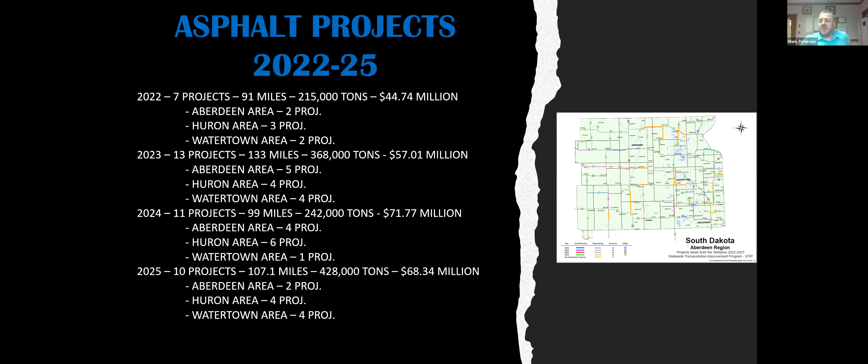And then in 2025, we're looking at 10 projects for 107.1 miles, 428,000 tons for $68.34 million. 2 of those projects in the Aberdeen area, 4 in the Huron area, and 4 in the Watertown area.

A little bit closer look at each year. In 2022, we linked the 2 South Dakota 22 projects together. They totaled 23.1 miles. That'll be South Dakota 22 from I-29 to 15 in Clear Lake, and also South Dakota 22 from Hazel East to US 81 North. Put together, both those jobs total about 48,000 tons.

Part of the reason we link jobs like that is just proximity, and then looking at our staffing within our area office to handle them. It gets a little easier for us, and we try to split them out as much as we can, but those two made sense to link together.

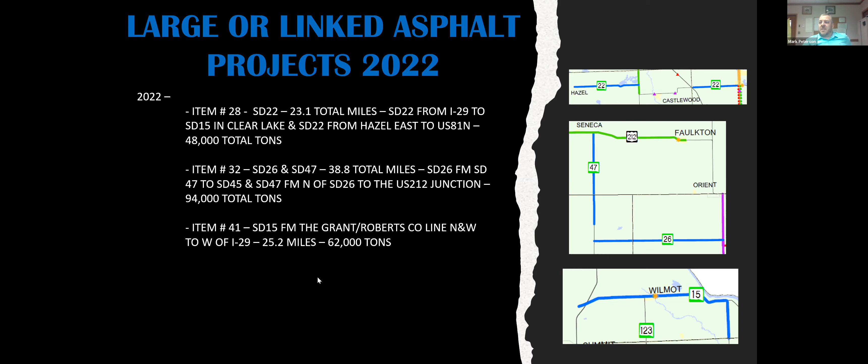And then the Highway 15 job and the Grant Roberts County line, that's a long job, 25.2 miles, and that's 62,000 tons. So those are the biggest asphalt jobs in 22.

In 23, we have Highway 12 from Aberdeen to Ipswich, a 24.7 mile job, 55,000 tons. Then one of our longer jobs, South Dakota 20, runs from the Faulk Potter County line all the way over to Highway 45.

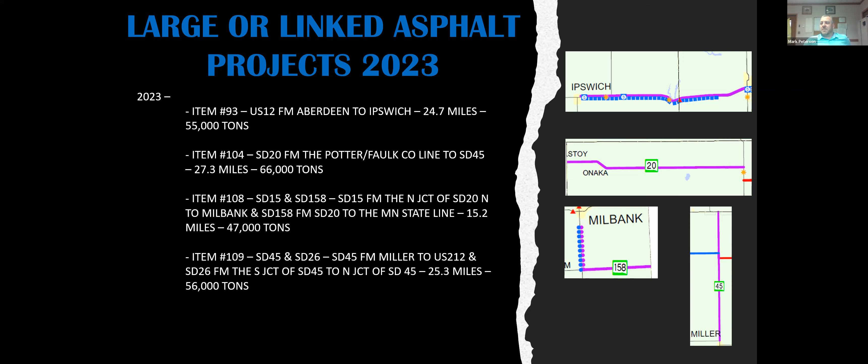That's 27.3 miles. And then we linked the Highway 15 and 158 projects because they butt up against each other. The 15 will be paving on a new grade, and then 158 is an overlay. That's a 15-mile job, 47,000 tons.

And then Highway 45 and 26 north of Miller. That's a 25-mile job.

In 24, we have the Highway 25 and 28 paving, and that'll be the paving on the grading job. It's a 16-mile job, 77,000 tons.

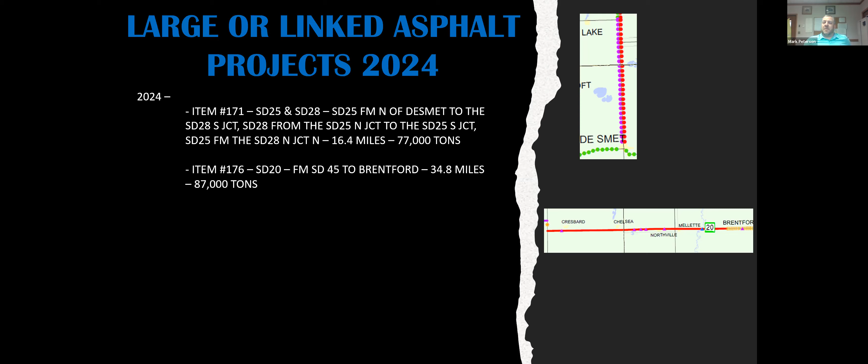And then on Highway 20, that's a long straight stretch there, 34.8 miles that runs from Brentford. We're looking at 87,000 tons on that job.

And then 25, we'll be doing US 212 from the Potter Faulk County line east. It's a 22-mile job, 60,000 tons.

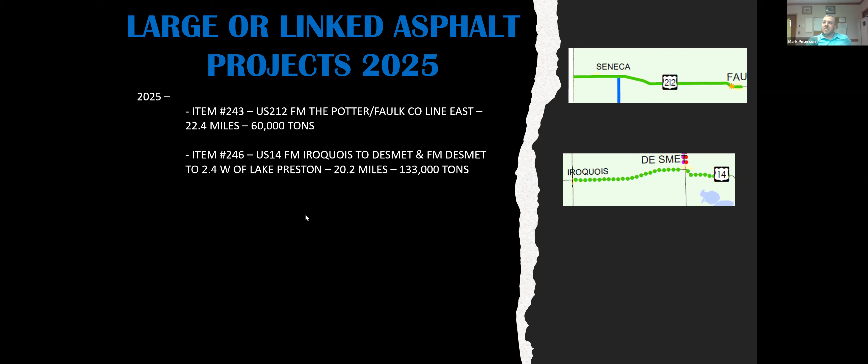And then we have the Highway 14 project. We link together that runs from Iroquois to DeSmet, and then from DeSmet to just west of Lake Preston. That's a 20-mile job, 133,000 tons. That's a crack and seat on the old concrete there, or rubbleized overlay, sorry.

For our grading and shoulder widening, upcoming years, in 22, we're looking at 4 projects, 16.9 miles of grading for $43 million. 2 in the Aberdeen and 2 in the Watertown areas.

In 23, we're looking at 19.8 miles for $28.4 million, 2 in Watertown and 1 in Huron. In 24 is a big year for us, grading wise, looking at 6 projects,

45.4 miles, almost $60 million. 1 in Aberdeen, 1 in Watertown, and 4 in the Huron area.

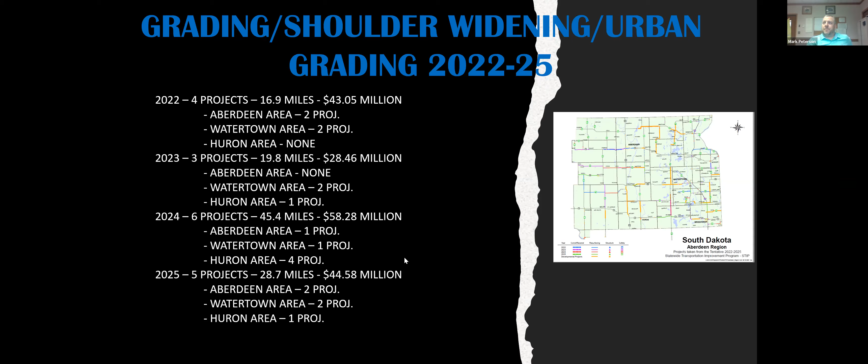And then in 25, we have 28.7 miles, 5 projects for $44 million. 2 in Watertown, 2 in Aberdeen, and 1 in Huron.

Looking at the individual projects within the years, Highway 12 from Ipswich to the divided highway west to Aberdeen, that's 20 miles. It's going to be super 2-lane construction. So we have intermittent passing lanes on alternating sides, and then intersection modification on that, and then paving on top of those lanes.

Item number 11, that's the Highway 12 project just east of Aberdeen. That's a grading and PCC paving job. That project I think will be let in 22, but I don't actually look for construction until 23 with the schedule we're going now, or some minimal work in 22. And that'll be concrete paving on top of that grading. That'll be converting that from a divided 4-lane to a joined 5-lane for most of that job.

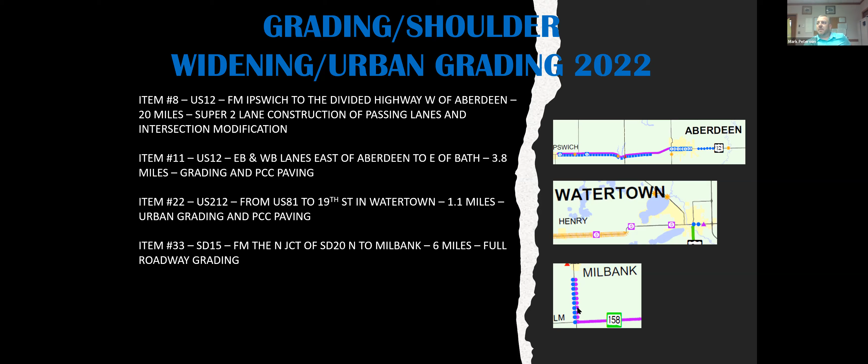US 212 in Watertown, that's a 1.1 mile urban grading and paving job. And then Highway 15 from the north junction of South Dakota 20 north to Milbank, that's 6 miles of full roadway grading there.

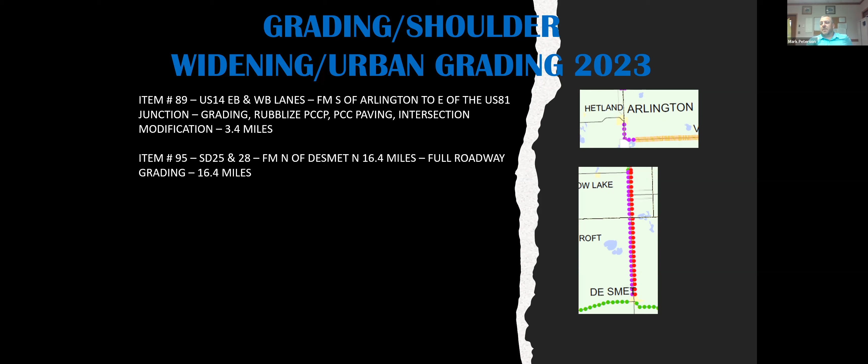In 23, we have the US 14 eastbound and westbound lanes just south of Arlington, and then that US 81 junction. We're going to regrade all of that, rubbleize the existing surface, and then PCC paving and intersection modification. And then Highway 25 north of DeSmet, 16 miles. That's full roadway grading on that project.

In 24, a 1 mile urban reconstruction downtown Huron. That's urban grading and concrete.

And then South Dakota 10, from east of the James River to Britton, that's a 24 mile shoulder widening project. I look for that one due to the length to be a 2-year project. So we're looking at 24, 25 construction.

South Dakota 34 and 249 in Fort Thompson, that's urban grading, curb and gutter, 3.1 miles.

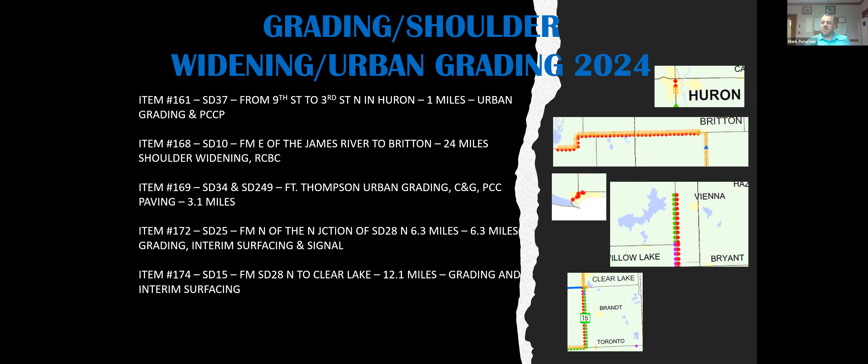South Dakota 25 from the North Junction of South Dakota 28 north, 6.3 miles. That's just north of the previous grading job. That's full roadway grading, interim surfacing, and then we got a traffic signal or a railroad crossing signal.

And then Highway 15, going from South Dakota 28 north to Clear Lake, that's full roadway grading and interim surfacing.

In 25, we got a project we're working on with North Dakota DOT. They're actually taking the lead on the project. We're going to regrade Highway 37 and raise it at the border where it goes underwater when we have high water situations in James River.

And we have Highway 25 from 9 north of US 212 to the Clark County, Day County line. That's 10 miles of full roadway grading and interim surfacing.

Highway 28 from Estelline to South Dakota 15. That's 9.2 miles of grading and interim surfacing.

We have South Dakota 28 going from 192nd Street just east of Lake Poinsett to about 5 miles west of Estelline. That's 3.5 miles of grading, interim surfacing. There's a structure that has to be replaced over the Big Sioux.

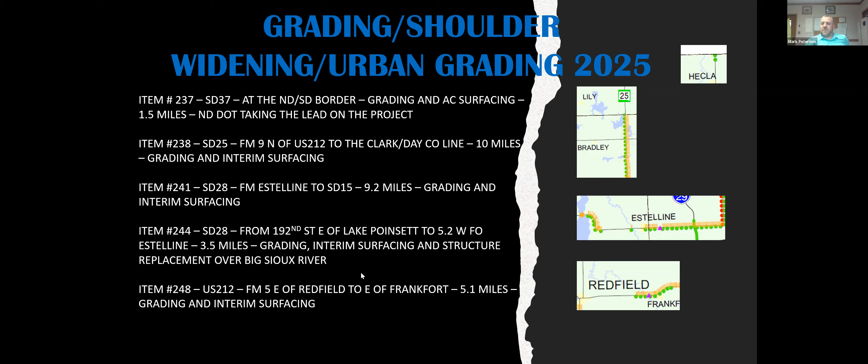And last, we have a 5 mile stretch of US 212, 5 miles east of Redfield. That'll be a full roadway grading and interim surfacing there. There's a lot of frost heave issues in that roadway.

Last but not least, looking at our structure outlook, we have a lot of local government type structures coming the next few years. In 2022, we're looking at 19 projects across the region for a total of $33.4 million: 6 in the Aberdeen area, 7 in the Watertown area, and 6 in the Huron area. In 23, we're looking at 23 total projects, 24 structures: 1 in the Aberdeen area, 5 in the Watertown area, and then we have 17 in the Huron area that year.

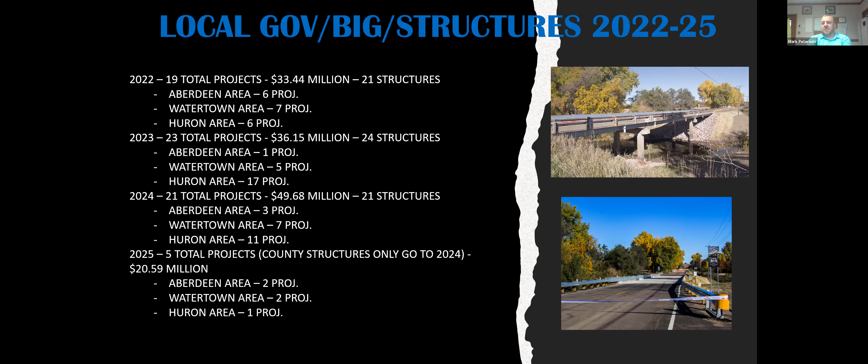In 24, 21 projects and structures for $49.7 million. We're looking at 3 in the Aberdeen area, 7 in the Watertown area, and 11 in the Huron area. And then in 2025, we have 5 total projects. These don't include any county structures because right now on our schedule, the county structures only go out to 2024. But we're looking at $20.59 million on the state system for that year: 2 in the Aberdeen area, 2 in the Watertown area, and 1 in the Huron area. So that's kind of the overlook of our larger and more complex projects.

You got any questions?

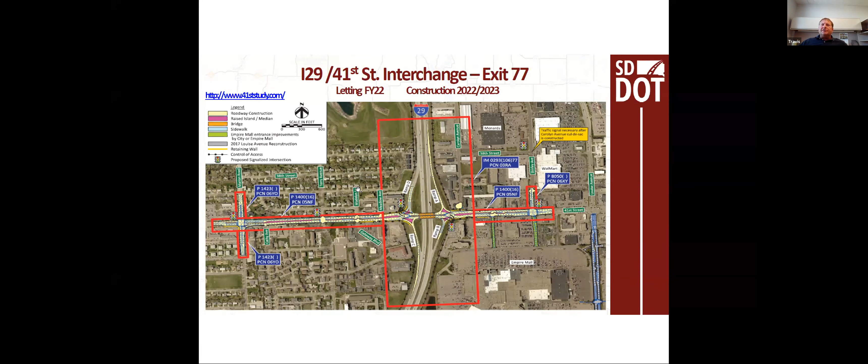This project includes underground work with the city of Sioux Falls, 36,000 yards of unclassified excavation. We have 65,000 squares of concrete paving and another 22,000 square feet of retaining walls at the interchange.

Moving a little south, this is the 85th Street interchange, or proposed interchange, at exit 74 in Sioux Falls. Almost $50 million on this project. It's another diverging diamond, with letting in 2022 and construction likely in 2023, 2024.

The new structure here over I-29 will also include a structure built over the southbound 229 on-ramp, plus reconstruction of 85th Street along with Sundowner all the way through the Tallgrass intersection. Again, this is a combination letting with the city of Sioux Falls.

One thing not shown on this slide is a northbound auxiliary lane on 29, wrapping around 229 to Louise Avenue, and then replacing the northbound off-ramp at Louise.

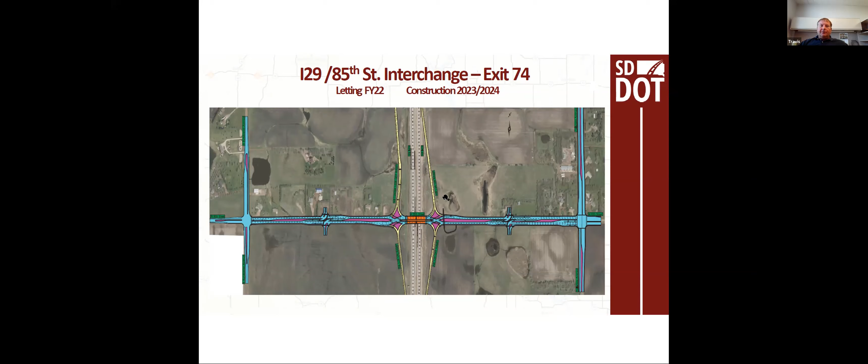We're still working through some of the sequencing and time provisions on this project, but we know we're looking at 2 years: 175,000 yards of unclassified excavation, 125,000 to 425,000 yards of borrow, 135,000 squares of concrete paving, and 14,000 square feet of retaining walls at the interchange.

Next project is Highway 42 from the Big Sioux River to Iowa. Right now we have this slated for 2022 letting, with construction in 2023 and 2024. We've been looking at this closer and coordinating with another Highway 42 project to the west, so we may potentially defer this one out to 2025, 2026 construction.

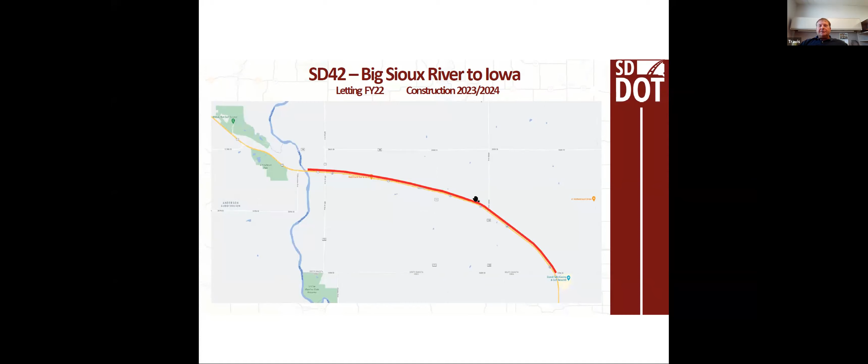This one's a cost of $35.9 million. It's a pretty good sized grading job: 250,000 yards of borrow, 200,000 yards of contractor-furnished select, 200,000 squares of concrete paving and concrete shoulders on this job.

Moving on to our 2023 projects, exit 406, I-90 and Highway 11 in Brandon. Another diverging diamond here at a total cost of just under $37 million, with letting in 2023 and construction in 2024.

Just under a mile of interstate reconstruction here, from Split Rock Creek through the railroad bridges to the west. Then just over half a mile on Highway 11, or Split Rock Boulevard, from Ash Street to the north limits. We'll be maintaining traffic during construction on this project.

The way we foresee this going is reconstructing the westbound main line along with the bridge over the railroad, constructing the west side of the Highway 11 structure over I-90, and then the following year completing the rest of the project.

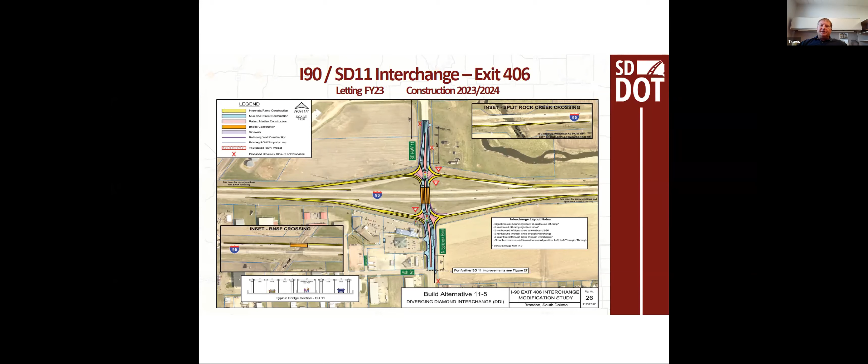All three bridges on this job are steel girder bridges. We have some MSE walls here at the interchange, 76,000 yards of borrow, 166,000 yards of unclassified excavation, and about 65,000 squares of concrete pavement.

I-229 to Benson Road, this is exit 9 in Sioux Falls, another diverging diamond. $41.7 million on this project. Looking at a 23 letting on this one, construction 23 and 24.

So we'll be retaining the existing Benson Road Bridge, constructing a new structure to the north side. That will happen the first year. Looking at building the north side of Benson Road in year one, building the Lewis Avenue intersection and quadrants. The work over here, this will be converting from a 4-lane to a 6-lane section.

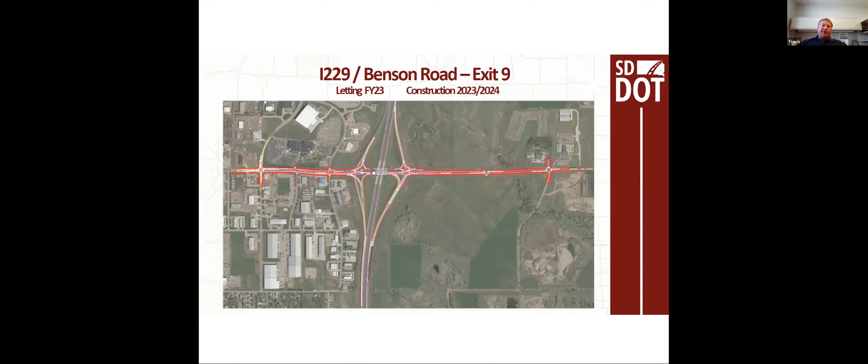To the east of the interchange, going to a 4-lane section, both years to complete this, but traffic needs to be maintained during construction at all times. In 24, we'll move back to the south side. We'll put a little slump deck overlay on the existing bridge and then finish out the remainder of Benson Road on the south side, 24.

Another 23 project here, construction in 23, 24, big grading job here on Highway 46 from Beresford to Iowa. We're looking at right now splitting this project at Highway 11. There's a small exception area through the intersection of Highway 11. So likely building the west half of this job first in 23, the east side in 24. This will have an interim surface upon completion on this job.

About 1.5 million yards of grading, next to no borrow needed on this job. So it comes pretty close to balancing out. Some box culvert work on it. The final surfacing for this project will be in 2025, and that will be concrete paving. So about 250,000 square yards of concrete paving on this project, 25.

Projects here on US 18, I-29 to Canton. So letting this one fiscal year 23, construction 23, 24 on this job. So 8 miles of reconstructing rural 2-lane to divided 4-lane, $65 million project here. So it's a good sized one. Grading concrete paving. This project will maintain traffic during construction.

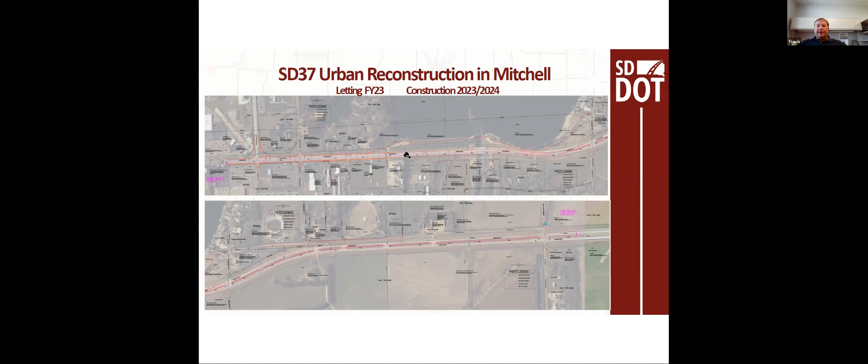There would be some city utilities on this project, new storm sewer, traffic signal, shared use path, roadway lighting. Basically just looking at constructing this one half at a time. Total excavation on here is 130,000 square yards and then 103,000 squares of concrete pavement on this job.

Next one, South Veterans Parkway. So 8.5 miles of expressway starting up here at 57th Street down to I-29. I just put all these projects onto one slide, but they're going to come in consecutive years. If you're not familiar with the project, southveteransparkway.com. You can go there to get some information on the project. Again, this is fairly new, so there's not a lot of information out there.

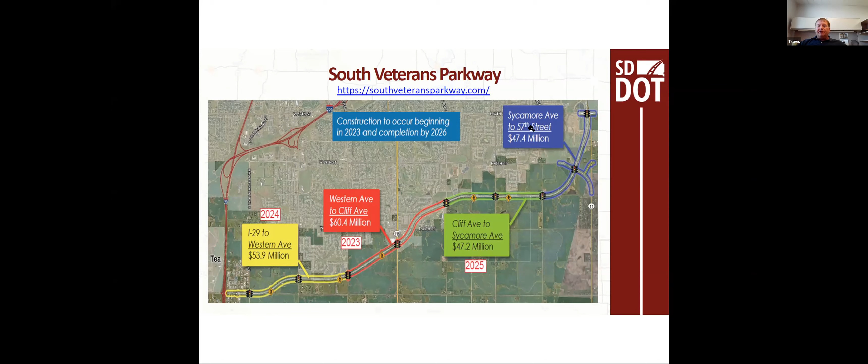I'm actually having a meeting this afternoon on this project from Western to Cliff. So Western to Cliff here in 23, I-29 to Western in 24, Cliff to Sycamore in 25, and then the Sycamore to 57th is likely coming in 26. So 209 million between all 4 projects.

Some combination work with some work on the arterial connecting roads as well. So divided 6-lane expressway. I don't have a lot of information on the quantities yet, but generally we're looking at about a 1.5 year construction timeframe on these projects. At least one structure over the railroad, several pedestrian underpasses here at these locations. A lot of grading work and concrete paving on this project.

Moving a little further along here to 2024. So eastbound I-90, west of Humboldt, east of Hartford, $36.2 million project. So this is the sister project to that westbound lanes in FY22. So letting this project in FY24, construction that same year. So this will be a 1-year project.

Again, 13 miles of interstate. 2 structures on this job, a bridge and a box culvert. Again, grading, processing, subgrade topping, concrete paving at 200,000 square yards and asphalt shoulders on this project.

From Highway 42, Willow Run to the Big Sioux River. This project is currently scheduled for 2025-26 construction. But the project to the east may be deferred, so this one in turn may advance to 24-25 construction. It's about a little over 1.5 miles of urban grading through here.

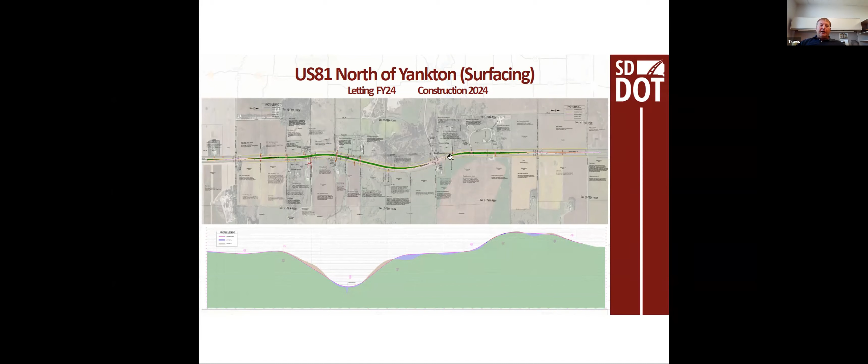About 3 miles of asphalt paving over the existing concrete divided sections, 13,000 tons there. Then concrete paving on the divided 4-lane going north, 4 miles, about 170,000 squares of concrete paving on that job.

If you remember from one of the earlier slides, we had about $387 million in FY24. A good chunk of that is going towards the Highway 44 regrading and the replacement of the Platte-Winner Bridge. This is a $150 million project. We'll be replacing the Platte-Winner Bridge, just under 5,800 feet long.

That project will be shifted to the north of the existing bridge, so we'll be maintaining traffic during construction. Preliminary layouts have this as a steel girder bridge right now, 19 substructure units. Pretty significant realignment of 44 coming into and out of the structure. We have about 520,000 yards of unclassified on this job, 340,000 of that's going to be waste. So we're looking for some state option waste sites for this project.

You can see the alignment affects the Snake Creek Recreation Area. We're going to have a project in 2023 to do some site grading to relocate the residence, the maintenance building, and build some internal roads within the recreation area. We're going to let that project through the Office of the State Engineer, likely here in 2023. That project will have about 60,000 yards of waste on it.

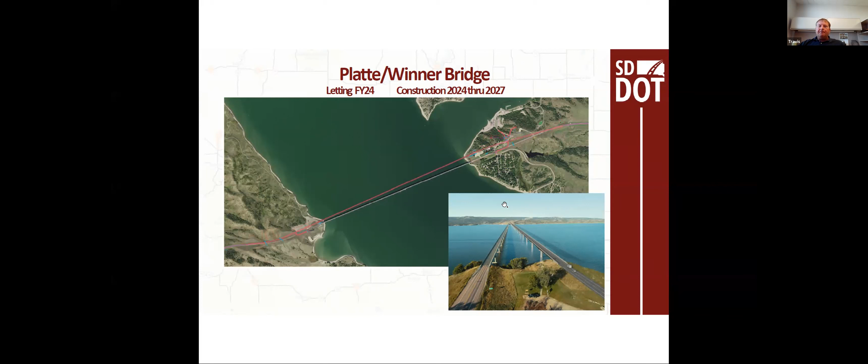Still working through the sequence on this project and what it's going to look like, but we're thinking construction 24 through 27 - 3 years of construction on the bridge, 1 year of bridge demo. Again, traffic's maintained at all times during construction on this one.

Moving on to I-229 at Cliff Avenue, this is exit 4. This is a product of the major investment study from back in 2017. We'll be reconstructing this from a standard diamond interchange into a single point urban interchange. A little bit of work here on 41st Street to realign it to the north, work on the arterial of Cliff from just north of the Sioux River up past Lincoln High School.

This project's construction is 25 and 26, but we'll also have a project here in 2024 to build a temporary northbound 229 diversion located just south of the existing structure. We'll set the temporary bridge, pave out the diversion, build in some of the ramp crossovers to hopefully have this project ready to go from day one once it's let.

We have this scheduled for 2 years. We're looking to get the bulk of this work done during the first year. I don't have a lot of quantities on it, but you can see it's mainline paving, 6 lanes total, 2 structures over Cliff Avenue.

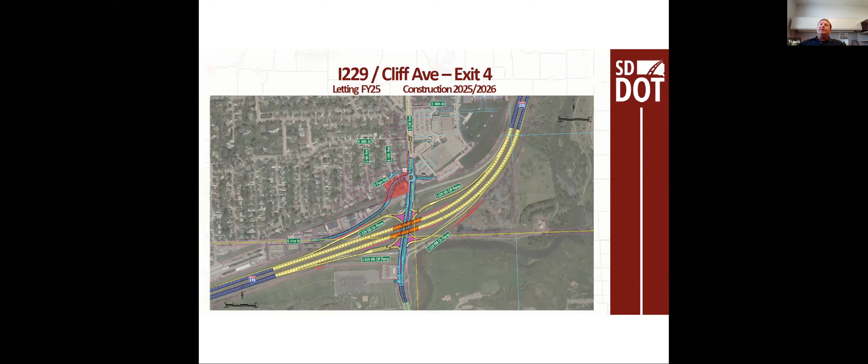One major phase of this project towards the end is going to be removing this diversion material, hauling that to the west and placing it almost in the same manner for the upcoming Minnesota Avenue reconstruction, which is scheduled for 2027. Projects kind of drop into line with one another.

And finally, the last project I have for you today is I-90 at Hartford. This is exit 387, fiscal year 25 letting. Currently thinking this will be a 1-year project, construction in 2025. A little bit of work here on Western Avenue with the city of Hartford from Jeffrey up to Mickelson Road. $23 million project here.

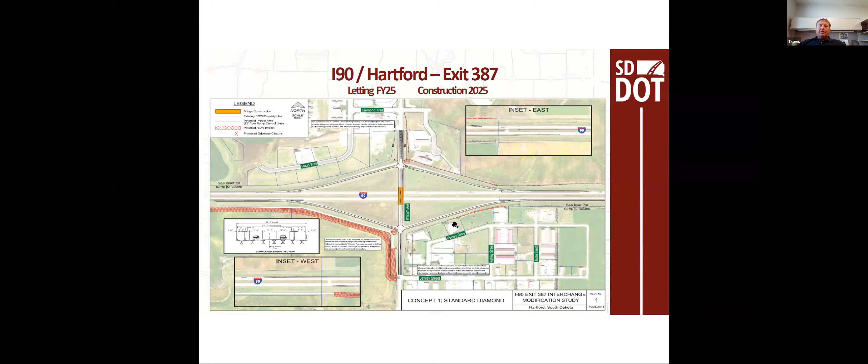This is just one of the concepts, but all of them being looked at are diamond interchanges. We'll be maintaining traffic during construction, building the west half of the bridge first, so that will be phased construction on the bridge. 50,000 yards of unclassified on this one, 140,000 borrow, and concrete surfacing on this job.

So that's an overview of the significant projects coming in the Mitchell region over the next 4 years. I'd be interested in any questions or comments you have.

Any questions or comments for Travis on the Mitchell region projects? If not, I did get a couple in the chat. I'll just go ahead and take care of those now.

There was one about whether some of this information on quantities and things like that is going to be available. For those that don't know how the process works, this will go to our commission to approve the tentative STIP. Once that's done, our project development office has shared quantities in the past with Toby through AGC, but we'll work with them to see if we can provide some additional information, either through our website or somehow get that out there. Also, since this is being recorded, we'll work with our communication folks to get this, at least the presentation, posted on the website.

The other question was about some of those local structures that Mark went through, more than Travis, but is there any thought of combining some of those projects if there's 3 or 4 structures in one location? Those are being reviewed. As Mark indicated, we combined some of our asphalt projects, but that will be reviewed for some of those smaller local projects on the county routes and things like that, where it makes sense. But there's a lot more information and details to work out on that.

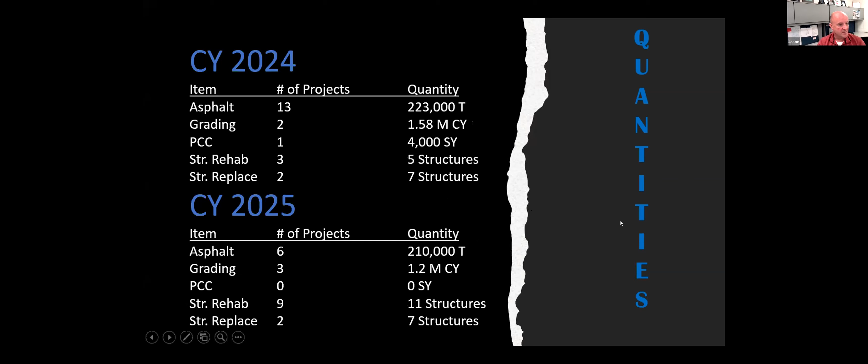The types of projects we're going to be seeing in the Pierre region are pretty much asphalt and grading type work. We have 11 projects for 400,000 tons in '22 and about 400,000 tons in '23. Those 2 years we have 4 grading projects, and we'll talk about a couple of those. Likewise in '24 and '25, we're still not having much PCC pavement going on, but it'll be mostly asphalt and structural work or grading work - 5 projects coming up in '24 and '25.

The first project I want to talk about here today really isn't even a project in our STIP. It's actually a project that's coming up in our letting in September. This is our Presho to Reliance paving job.

This started off as being strictly a paving job at 25 miles eastbound and westbound lanes. Over the last few years, the scope has crept a little bit, and now it also includes 19 structures to be rehabilitated on these sections of low slump overlays and epoxy deck seals and the like.

It was because of the scope creep, we had a lot of concerns about how long this is going to take to get completed. So we originally wanted this to be a head-to-head project, do all 25 miles one way, and then do 25 miles in the opposing lanes the next year.

Our customers, the public, really don't appreciate being put in a head-to-head section for 25 miles in a row. So we broke that up and looked at several different options. Ultimately what we did is we put together a meeting and invited several contractors in to come talk to us and help us work through this.

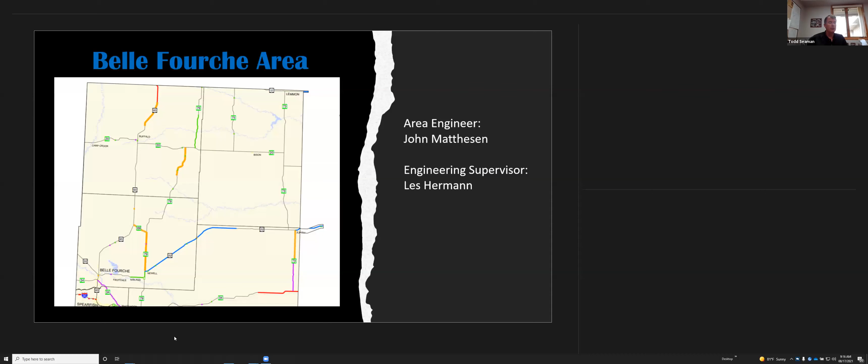Again, those presentations and handouts for all 4 regions are available on the DOT website on the project development page. Specifically for the Rapid City region, we make up the 9 westernmost counties in South Dakota, and for the 4-year STIP we have right at $618 million worth of construction work. With that, I'll turn it over to John, and he'll cover the projects in the Belle Fourche area.

Thanks, Todd. All right, I'll start with Belle Fourche area surfacing, resurfacing 2022. First job I'll talk about is the Newell to Maurine. It's nearly 48 miles, has quite a bit of pipe replacement, 1,000 feet pipe replacement, and it's a little over $20.5 million. Anticipated lettings in the fall of 2021 and completion roughly a year later.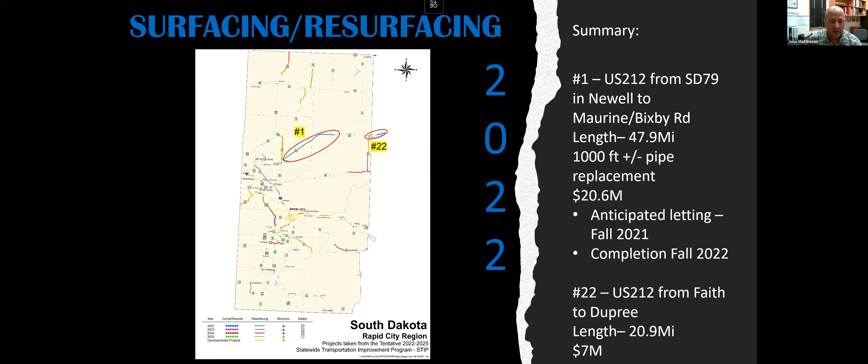Just to the east of that, another pretty good sized paving job, asphalt paving. It's from Faith to Dupree, nearly 21 miles, estimated at 7 million. So a lot of paving on 212.

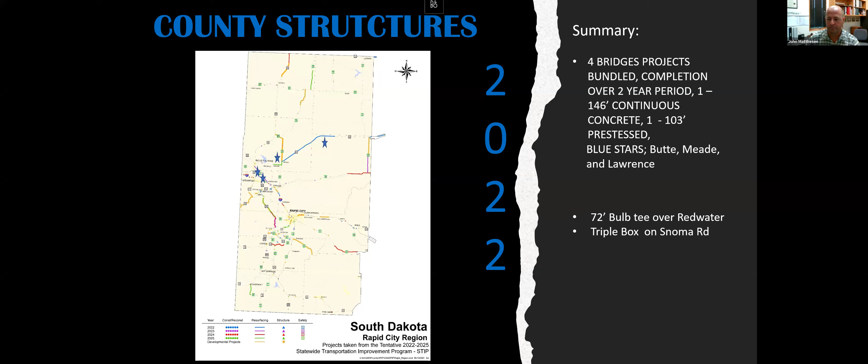Other jobs, county structures - we're talking about bundling some projects. One has four county bridges. We know what 2 of them are: one's a continuous concrete, one's pre-stressed. Not clear on the other 2 yet, but the 4 blue stars indicate the locations, in Butte, Meade, and Lawrence County. 2 more structures in 2022, county structures specifically: a bulb tee over Redwater and a triple box on Snoma Road. So a total of 6 county structures that year.

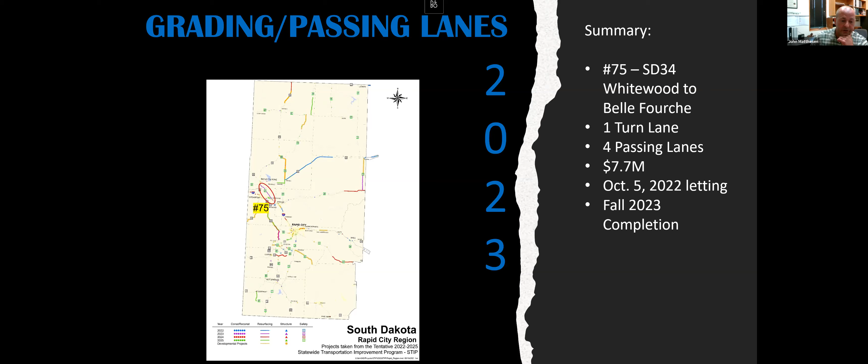2023, Belle Fourche to Whitewood - we're adding 4 passing lanes and a turn lane, estimated around 8 million. An early October 2022 letting, hoping to start earlier, but won't be able to get too much done that fall. Completion date is 2023 fall.

Some more county structures in 2023: 6 county structures - 1 in Perkins, 1 in Lawrence, 3 in Butte, 2 in Meade - and we'll more than likely do some bundling after the structure types are determined.

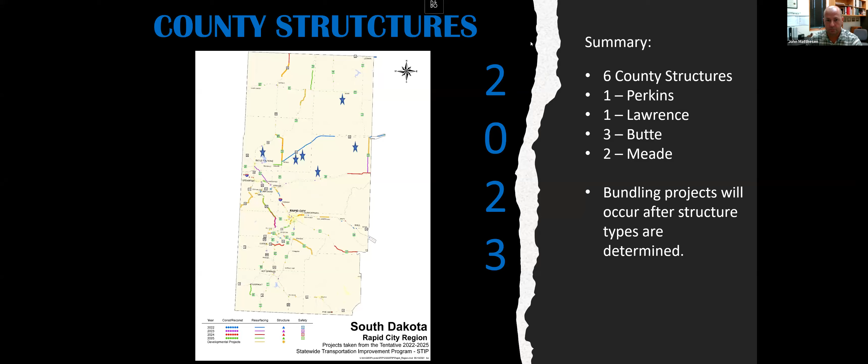And with that, I'll turn it over to Steve Palmer, I believe. Thanks, John.

All right, I think we're ready. Everybody see that one correctly? So I'm Steve Palmer, the engineering supervisor with the Rapid City area office, and I'll just go through each of our years, split up like Mr. Matheson did.

So in 2022, starting with exit 37, this is going to be a reconstruction of Interstate 90 between exit 37 and exit 40, including reconstruction of exit 37 and rebuilding the Tilford Port of Entry. This will be a $32 million job looking at a March 2022 letting.

Pre-rally of 2022, we'll be looking at off-alignment grading, parts of the westbound ramps, potentially parts of the eastbound ramps, and getting started on the substructure grading. Post-rally 2022, we'll be getting into the westbound boxes. We are not going to be resurfacing all of westbound interstate here - that was done in 2008. We're looking to get some median separation in this area for potentially a 3rd lane between Rapid City and Sturgis in the future if needed.

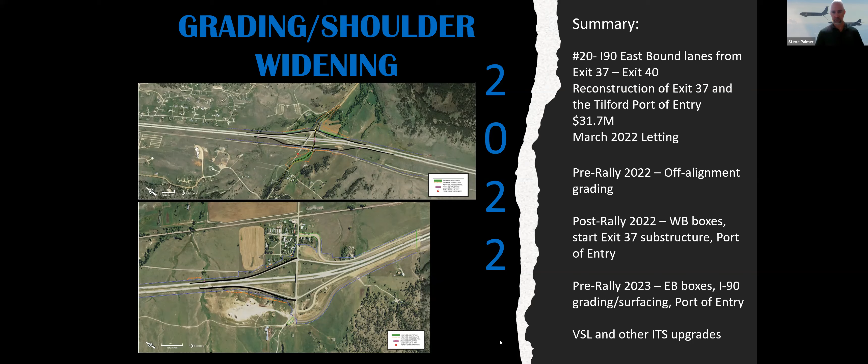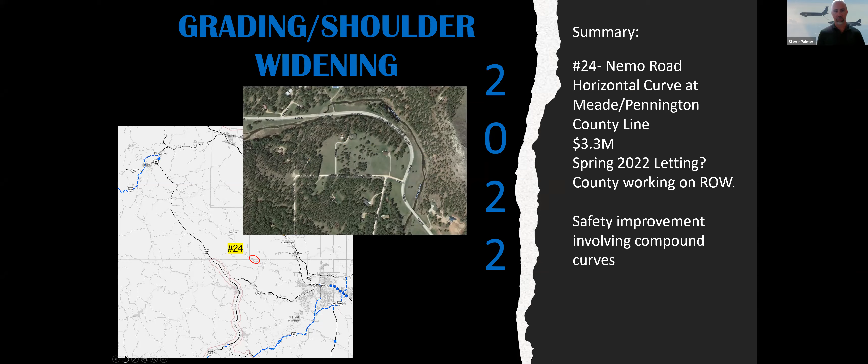Also in 2022, Nemo Road, Pennington County project, horizontal curve realignment for $3.3 million. We think we're looking at a spring '22 letting, but the county is still working on right-of-way. We've had a number of accidents, including due to the compound curve of the roadway, and we're going to get that straightened out.

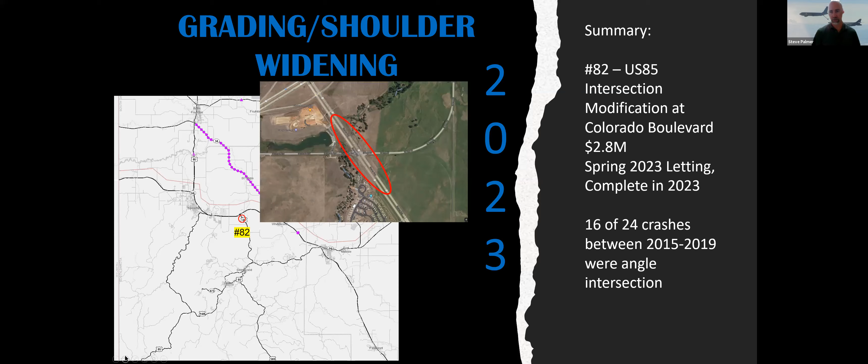Also in 2023, the intersection of Highway 85, just south of the interstate, with Colorado Boulevard on the east side of Spearfish. We've had several angle intersection crashes here, and we're looking to convert it to an RCI, or reduced conflict intersection. Basically it becomes a three-quarter movement for ingress onto 85, with that left turn restricted, but you make a right turn, go to the next intersection, and make a U-turn through the median. That'd be a $2.8 million project, looking at a spring 2023 letting, complete in 2023.

Also in 2023, I-190 in Rapid City, we have the Anamosa Street structure that's going to be replaced. That is load limited right now, so this is on the fast track to get this one replaced. A $4.8 million job, looking at a March of 2023 letting.

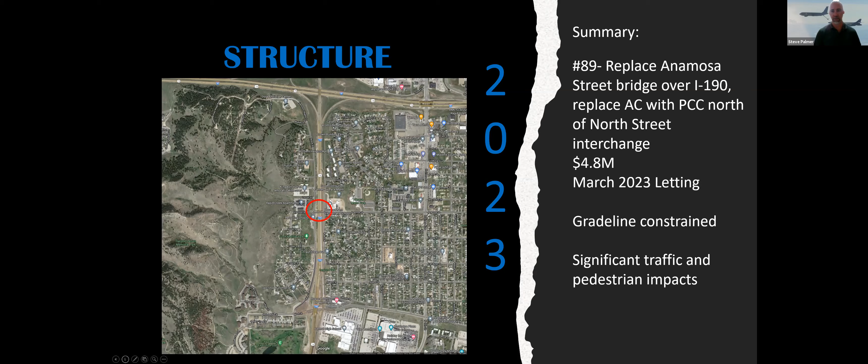Also in 2023, we've got some local structures: 5 structures, 5 projects, at 4 locations. This one on the upper left replaces the Elmore Road structure over Spearfish Creek at $400,000. Heuther Road, south of Wall down by the park, at $500,000 — that's a single structure by itself. Then these two just north of Quinn, right in the middle of the dot there, there's two within about a quarter mile of each other that need to be replaced. And then one over San Marco Boulevard over the Pierre Street drainage ditch in Northwest Rapid, at $400,000. These are all scheduled currently for an end of September 2023 letting, so likely end of 2024 completion.

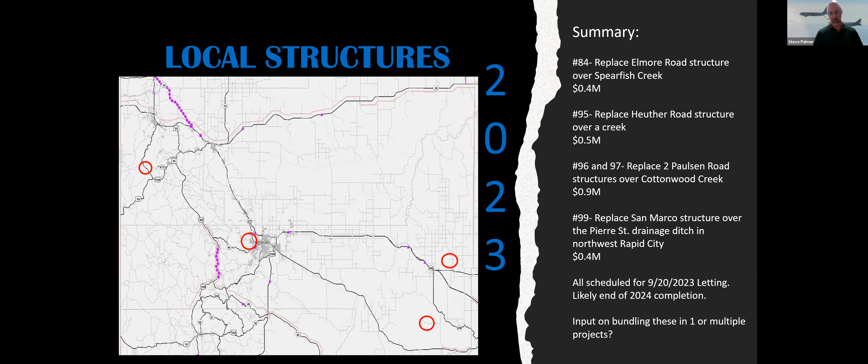So we'd like to hear some thoughts on how these could be bundled, whether by geographical location or by structure type. We'll ask those questions here at the end as well.

Moving on to 2024, this is the Exit 46 interchange, a $33 million project. Looking at a post-rally start in 2024, starting on the Elk Creek Road grading, right through here. I don't remember exactly the numbers, but there might be about 250 to 300,000 yards of material that could be moved immediately. In addition, working on the railroad structure, and there's retaining walls for the westbound ramps.

That's work that can start probably post-rally of 2024. Then pre-rally 2025, we work on the westbound lanes of I-90 here. And I believe there's 5 or 6 box culverts that cross underneath the interstate right at this location.

This project actually goes from exit 44 to the north, almost down to exit 48. It starts at exit 44 to the north and goes almost to exit 48 to the south. This is through Piedmont on the north side.

So again, through pre-rally 2025, working on those westbound lanes, the boxes, and the new structure over exit 46. Then post-rally of 2025, we'll work on some crossover adjustments. And pre-rally 2026, get back into the eastbound lanes and finish out those box culverts.

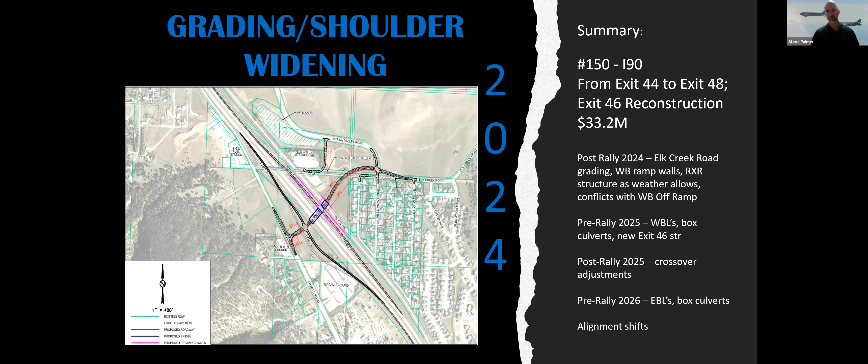As I talked about before with the exit 37 project, we're looking to widen the median, and this one will have some significant alignment shifts in both eastbound and westbound, which makes the sequencing a little challenging. We'll probably end up with some concrete median barriers down the median through the winter in between those two phases.

Also in 2024, 2 structures over Bull Creek, just east of Wasta, $11.8 million. We'll work on the westbound lanes pre-rally, eastbound lanes post-rally.

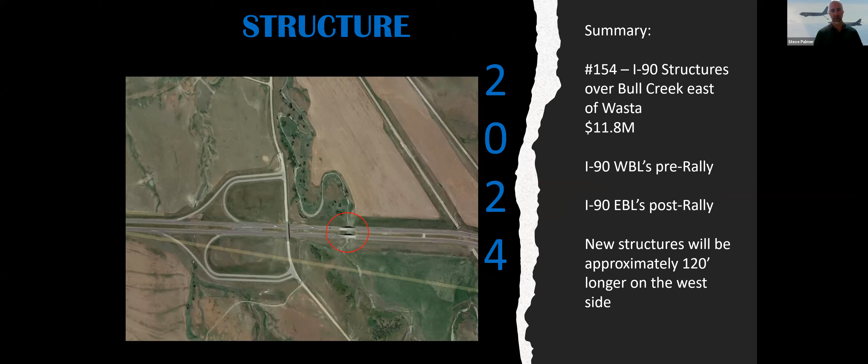These new structures will be approximately 120 feet longer than the existing structures, and the lengthening will happen on the west side.

In 2024, also, we're resurfacing Highway 44 from Scenic to 11 miles west of Interior at $8.5 million, about almost 20 miles of surface resurfacing. This includes several miles of full depth reclamation on the east end of the project.

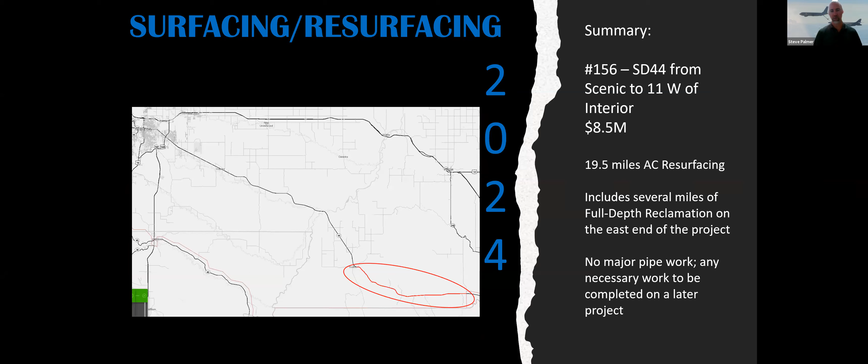We don't anticipate any major pipe work on this one. There's probably some ends to be replaced. We've tried to push this up due to the subgrade issues. So if we have any significant pipe work to do, that's going to be completed on a later project.

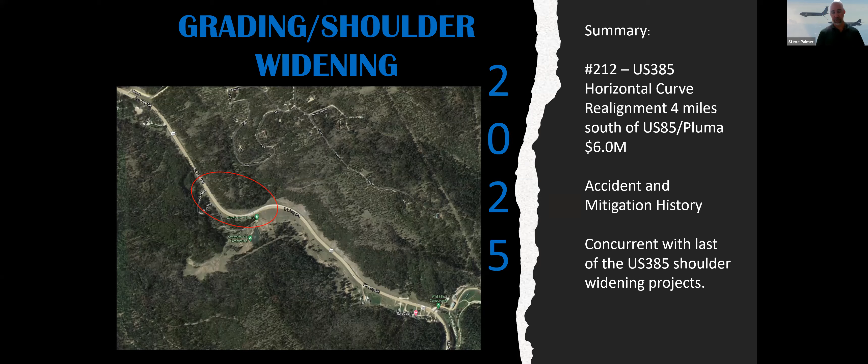Also, now moving into 2025, Highway 385 has a horizontal curve that we're going to realign on the south end of Strawberry Hill. It'll be a $6 million regrading project. We have a history of accidents on this curve, and also a history of mitigation projects that we've tried to reduce those accidents.

So this project in 2025 will be concurrent with the very last of the 3 Highway 385 shoulder widening projects that Mr. Zocker is going to talk about a little bit later. So we'll have 2 fairly significant grading jobs in the Rapid City area in 2025.

Moving on to the Highway 16 corridor, we'll have 2 projects in 2025 on Highway 16. This is the first one at Neck Yoke Road at a tune of $12.8 million. We've got accident history again at the intersection of Highway 16 and Neck Yoke Road.

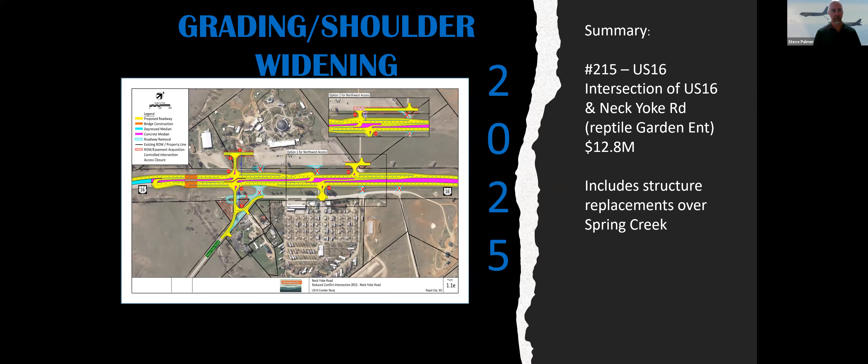We're going to replace this with an RCI again. This will be full regrading. In addition to the full regrading and resurfacing, we will be replacing the 2 structures over Spring Creek here on the left side of the screen. That'll be a 2-year project.

And lastly, in 2025, further west on Highway 16, we're going to modify a couple of intersections from Rockerville to Reptile Gardens. That project is coming in at $3.3 million. The reason this one is so much less than the previous one is this is not a full regrade yet on this project. This should just be widening for the U-turn points and some median modifications.

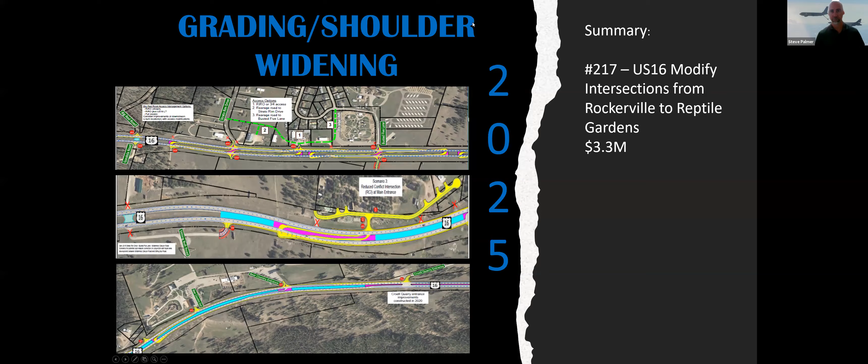Now see on the dash, or on the top screen there, we've got some dash lines. I'm not sure those costs have been captured in this cost yet. I'm sure that's going to be adjusted later. So, and with that, that is all I have.

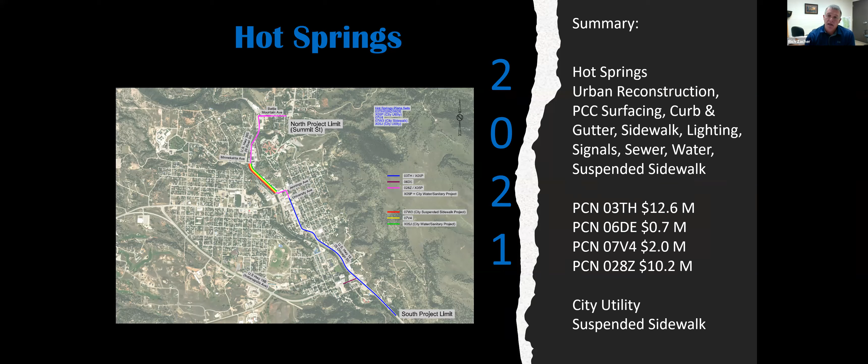Okay, is everybody seeing the Custer area? Yes, sir. Okay. We will start with a project that is not in the STIP because we're moving forward to try and get this let late October, early November of this year. It's urban reconstruction through Hot Springs, 58,000 square yards of PCC surfacing, storm sewer lighting.

The city has a very unique suspended sidewalk project. I'm drawing this to your attention because I want you to look for a notice of a pre-bid meeting that will be coming up shortly. Completion of this 2-year project would be in December of 2023.

We'll move to the 385 projects that Steve mentioned. This is a series of 7 projects on US 385 that go from Sheridan Lake to the Tomahawk Golf Course. Will begin in 2023 and be complete in 2026. There'll be 3 different segments of shoulder widening followed by full depth reclamation and asphalt surfacing. There's also crack seat and overlay across the dam at Pactola Lake.

The first project, which would be number 94 if you had the handout, will be let in spring of 2023 with a completion of May in 2024. There'll be 2 different closure areas from Sheridan Lake to Pactola.

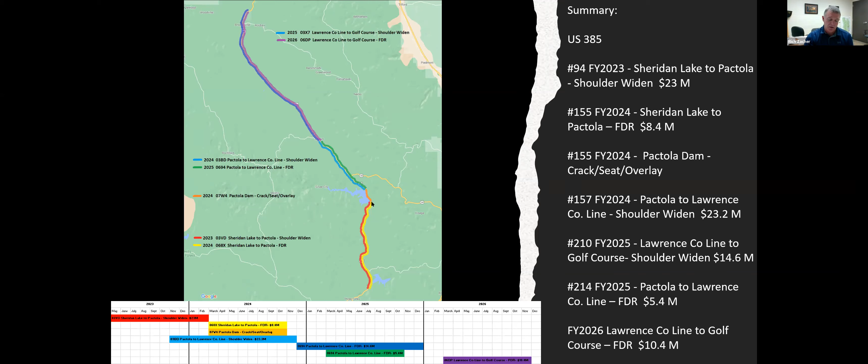Because of all of the rock and how vertical this section is, this will be closed for the summer. And as we near Pactola Lake, we'll have a winter closure as well on 385. $23 million on that one.

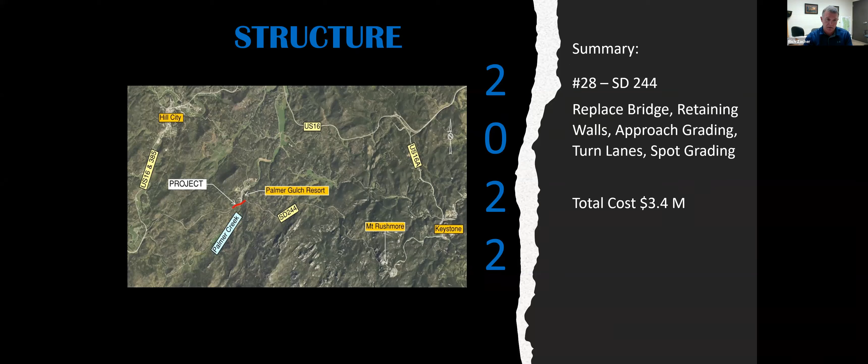We'll move forward to 2022 structure at Palmer Gulch Resort on South Dakota 244. This is scheduled for a spring letting of 2022. Once again, this road will be closed from October of 22 through April of 23 with a June 23 completion date.

We'll move ahead to urban reconstruction through Pine Ridge. This is on US 18 from the junction of 407 to the turn to go to the hospital. So PCC paving, there will also be some ADA work on US 18 and 407.

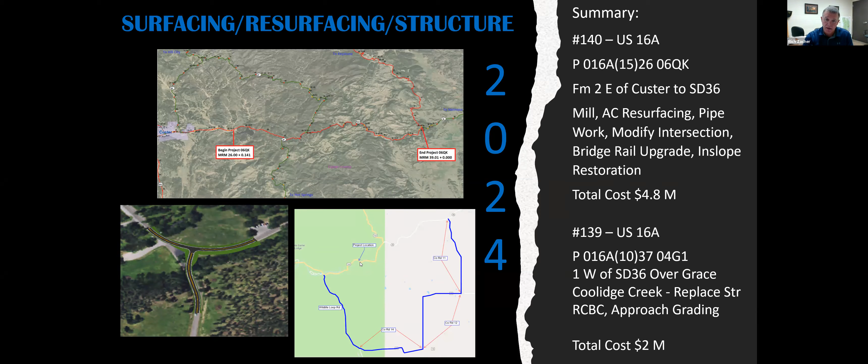Jump ahead here to 2024 project on US 16A through Custer State Park. Mill and overlay with a significant amount of pipe work. There will also be an intersection revision with the Wildlife Loop Road and structure replacement over Grace Coolidge Creek. During the structure replacement, which will happen during the winter months, there'll be a detour onto some county roads and onto the Wildlife Loop Road.

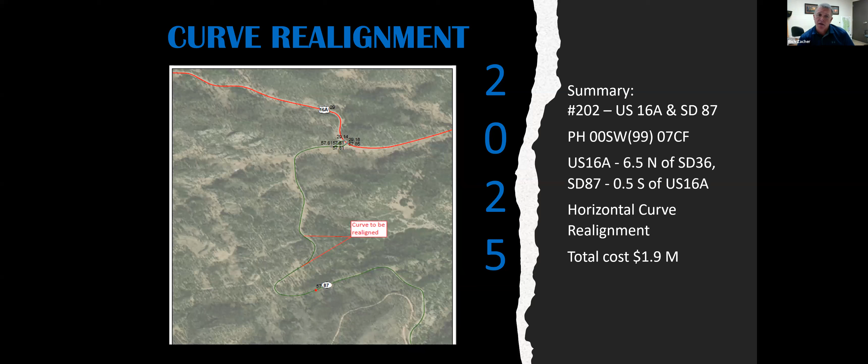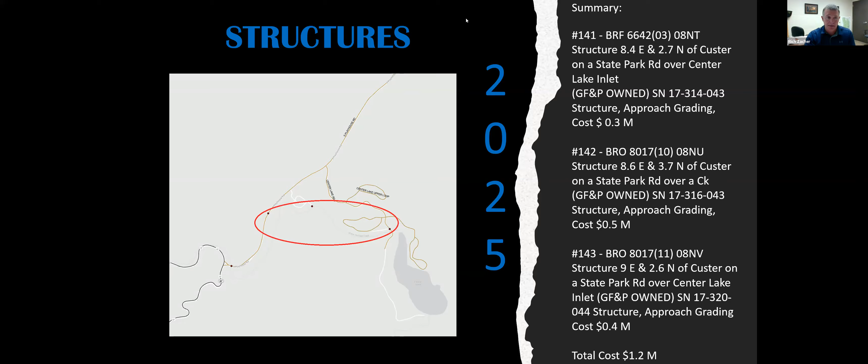We have a couple of curve realignment projects that will be let together due to some compound curves we want to fix. One is on US 16A near Spokane Creek. The other one is shown here on 87 near Mount Coolidge. These are 2025 projects. I'll finish up with some Game Fish and Park owned structures near the Black Hills Playhouse and Center Lake. 3 different small structures let in one contract, total cost $1.2 million. And that is it.

Any comments or questions for Rapid City Region staff?

Just one comment I would make, Craig, is that I think the contractors all noted the number of local structures in all 4 regions. We do plan, as Steve pointed out, to bundle some of those and combine different sites. So we sure would like input across the state on what makes sense to contractors and how to bundle those. So if you have input, we sure would like to hear that. Yeah, thanks, Todd.

Well, I guess maybe just to wrap this up, and then I'll close with some of the discussion on the material shortages and that. Definitely appreciate everyone's time. Like Todd said, we're certainly open to feedback, whether it's specifically to projects or even this process. This was kind of our first attempt this year to do something maybe a little bit more in depth than what we do during our normal tentative STIP public input process.

So, certainly if you've got some thoughts, just even throw them in chat today on what you liked about it, maybe information you wish would have been provided, that type of thing. And based on the comments and feedback, we'll certainly look to improve going forward. So we get the information.